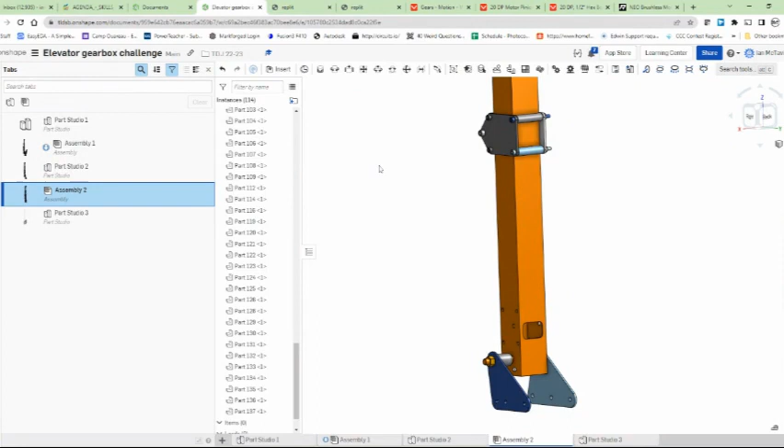Okay, so it is time to figure out how to make mechanisms move. So what we've got here is, I'll actually pull up their previous version.

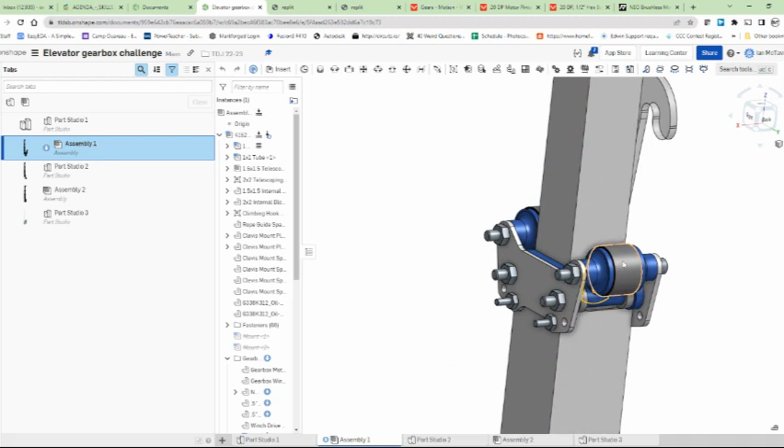This is our elevator from the 2022 robot. And what we have is a cascading elevator. So the idea is you have this square tubing and you have these constant force springs.

So the top, this constant force spring is actually attached to that hole right there. And the idea is that that pulls up. So these all pull up. At the very top, there's actually a string attached.

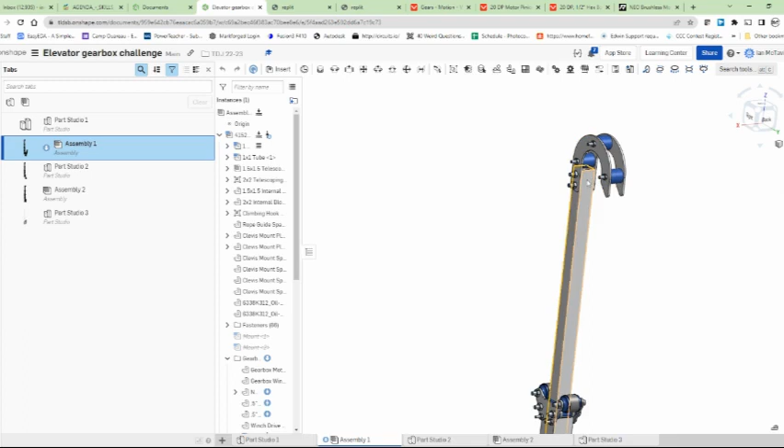The string goes all the way down to the bottom, and you have a pulley. So the idea is that when this motor runs, it winds up the string, and that causes these pieces to get pulled down. And when the motor is released, the springs will actually pull it up.

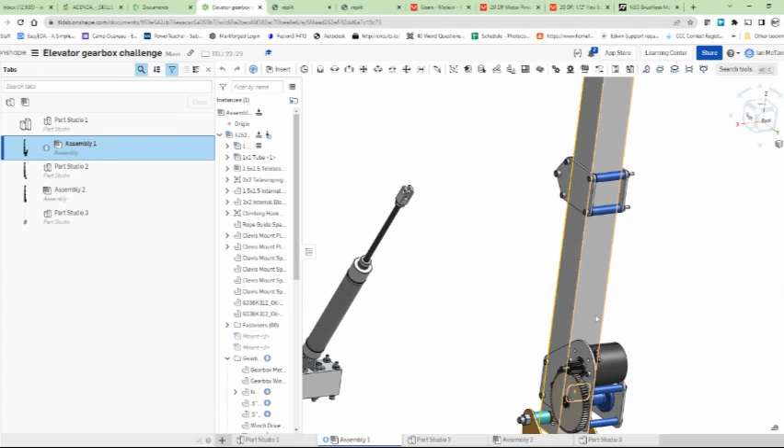So it's the elevator, you can only control the one way. The springs automatically push it up. So this is what we use to climb. And we've got a very simple gearbox here. And that's what we're going to go over to design.

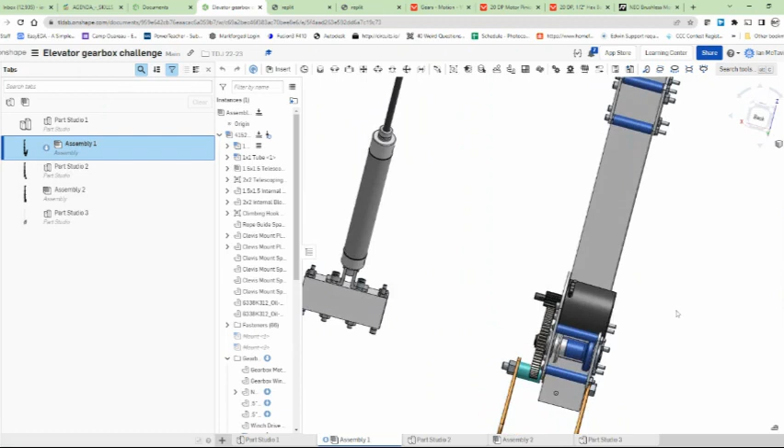So the question is, you need to know some data. The first thing is that this is designed to lift a robot. That robot is 150 pounds. So that's a fair bit of weight. And what you need to do is figure out, can you lift 150 pounds?

And that's what we have a calculator for. So with the calculator, you have this linear mechanism and you can pick the motor. So I'm just going to pick for you. We're going to use the Neo motor. And the Neo motor is a nice, small, compact motor. And you can see it right there.

And the nice thing with this particular motor is that it's got a fairly high amount of torque. And what that means is torque is how much weight it can lift. So basically, it can lift up to 2.6 Newton meters. So this is an amount of force, and if something is heavier, requiring more force than that, the motor will stall. So that's the maximum.

And with Newton meters, you need to get into physics and everything. But this is why we're going to use a calculator. So we've got a calculator here, and basically you fill in the motor and it fills in the speed of the motor, the stall torque of the motor, what the current is, and the free current. And the biggest thing is that we need to keep our current under 40 amps.

And then you can set how many motors in the gearbox. So if we had one motor, you can see this goes red because it's drawing more than 40 amps. So we know that this would not be enough to be able to lift 150 pounds. So if we had a smaller mass, then it could lift it. And unfortunately, our robot is going to weigh about 150 pounds, so it simply can't lift it.

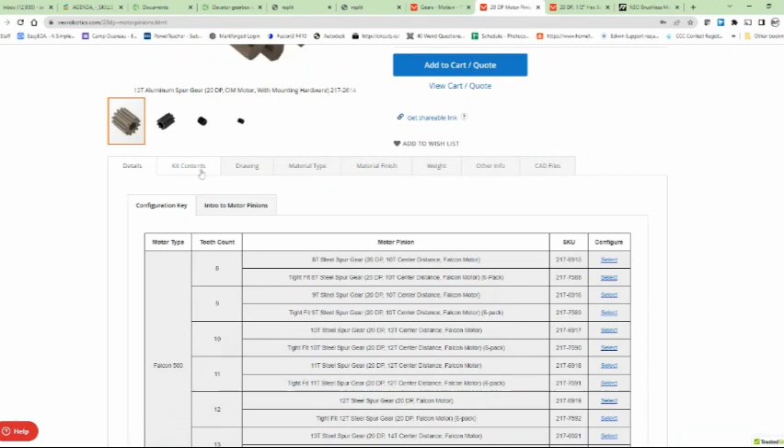So we don't need to have a Neo, we can use a CIM style motor. And you can see there's different size teeth with the different CIM styles. So when you're looking at this teeth, there's the CIM style, so 10 teeth and everything.

If you go to the drawings, we're just going to switch to, so these are falcons, 9 teeth, and here's our 10 teeth. So there's 10 teeth, and you can see there's something called the pitch diameter. So the pitch diameter is the distance of the circle where the teeth will engage with another circle.

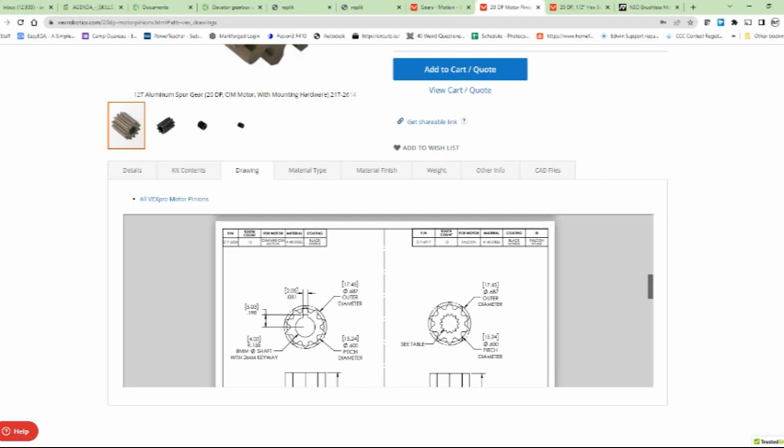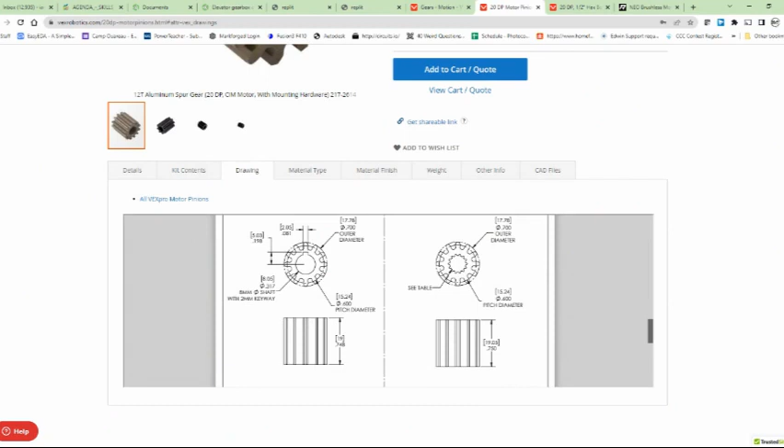That's really important. Now, normally, if we're dealing with 20 diametrical pitch, 20 dp, which is what these gears are, normally you can take the number of teeth divided, and when we get to 12 teeth, you'll see that. So here's 12 teeth, and the pitch diameter is 0.6. 12 divided by 20 is 0.6. 14 divided by 20, 0.7, etc. Now, when it gets really small, like 10 teeth, that kind of goes out the window. But anything bigger than 12 teeth or more, we can use that as a formula, which is really useful.

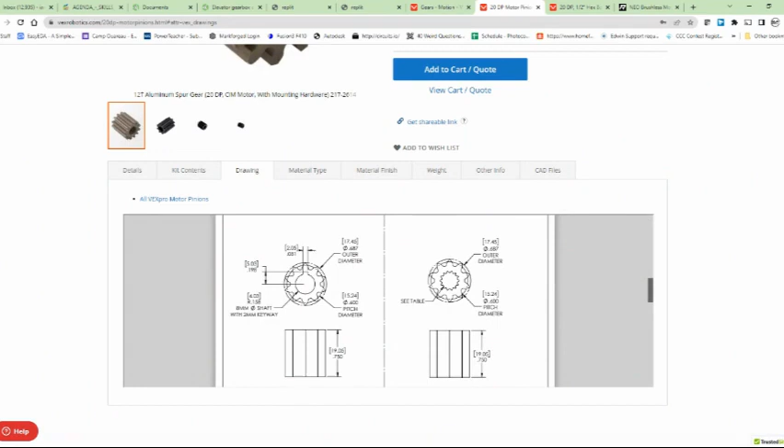So we're going to start. I'm going to start you off. You're going to use a Neo motor with a 10 tooth pinion. Okay, so that's what we're going to start with.

And when we're looking at this, we can see there's other gears. And so the 1/2-inch hex bore gears, there's our options. You can see we've got a lot of different options here. And basically, any of these options—so let's just pick a 50 tooth gear and let's plug that into our formula.

Now, we're going to use 2 motors because what we'll do is we'll do 2 arms. So we'll do 2 arms. And if we look at this, 34 amps, 10 to 50. So this should be able to do it. And it even tells you how fast it's going to take, just under a second to move the full 33 inches. So this is pretty good.

You can see we've got other options. And the biggest thing is that I would like to bring this down. I like about 25 amps, because if I'm at 50 teeth, 34 amps, that's 40 amps is my breaker. If something goes wrong, I could easily go over the 40 amps. So let's say I've got my 150-pound robot, another robot lands on my robot, adding the weight up to 300 pounds. In that case, I spike and it's just not going to work.

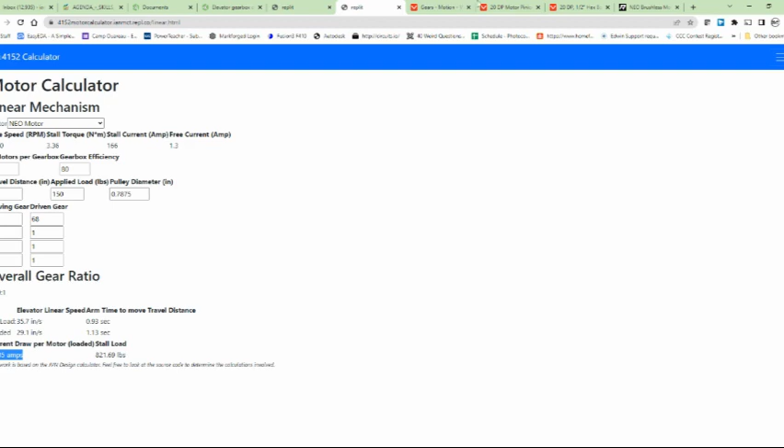So if we look at our drawing again, I mentioned 68, and the diametrical pitch, the pitch diameter, if I scroll down to 68, is 3.4. 68 divided by 20.

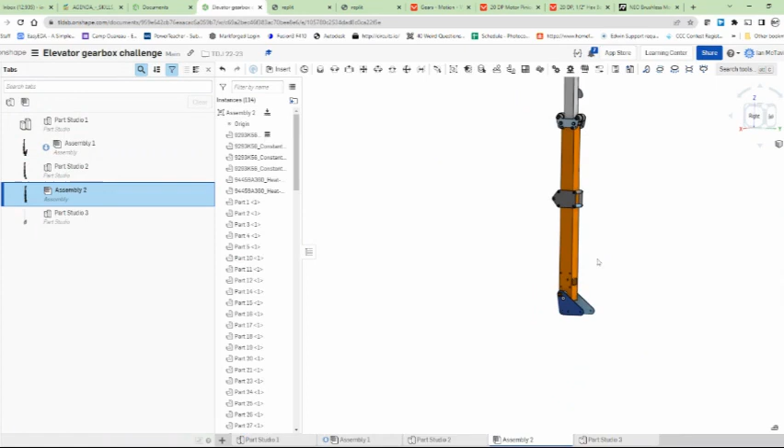Okay, so let's go over how to design our gearbox. So in this assembly, we've got everything, but we don't have the gearbox. Now we've set up our mounting holes, so that's good for us.

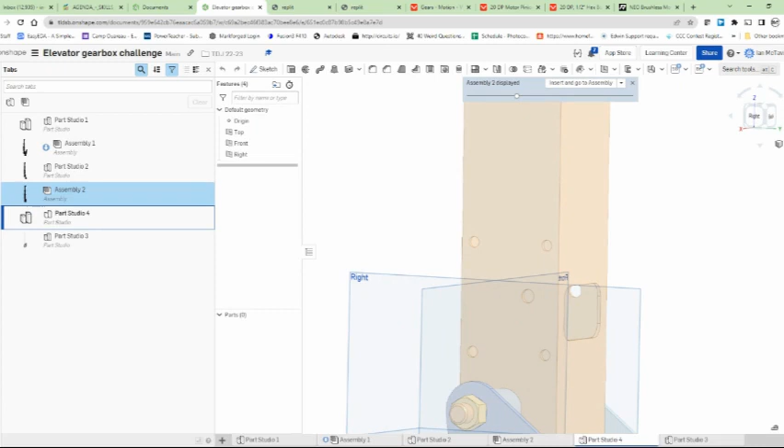We can use that. So what we can do is we can create a part in context. And we're just going to set the origin. And there's our part. Now, if we do a new—

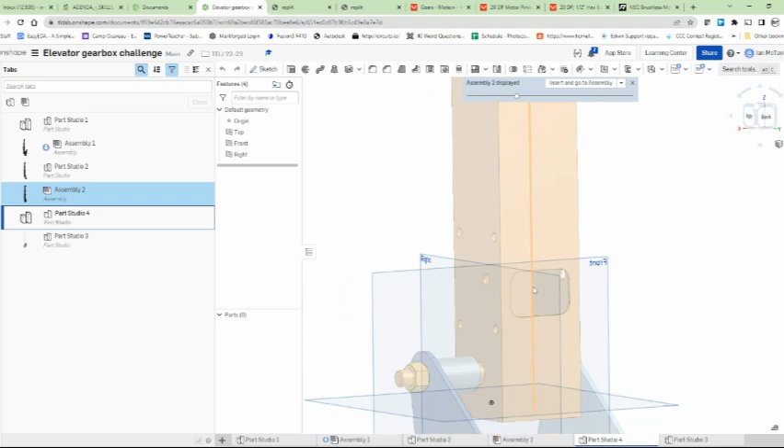What we want to do is basically we're going to have our pulley pull rope through here. And this is to have just a little bolt through here so that the rope is going to go around a little spacer so that there's not much friction. It's not going to wear and cut on the edge of the metal. So that's the goal, is where we're going to put everything.

And what we'll do is we'll create a sketch and we'll use this face as our guideline. Actually, I'm going to cancel that, because what I'll do is start with some variables. So my first variable is simply a number, and it's diametrical pitch.

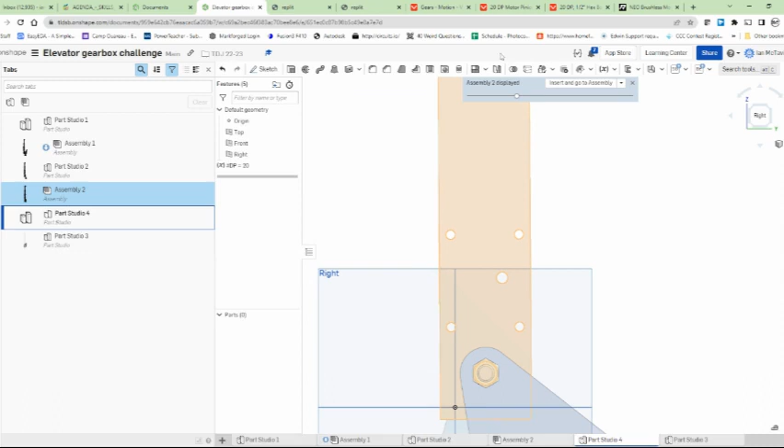And what we'll do is I like putting in my different gears. Gear 1 has 10 teeth. Gear 2 has 68 teeth. Now, gear 1, simply because I can't calculate it—

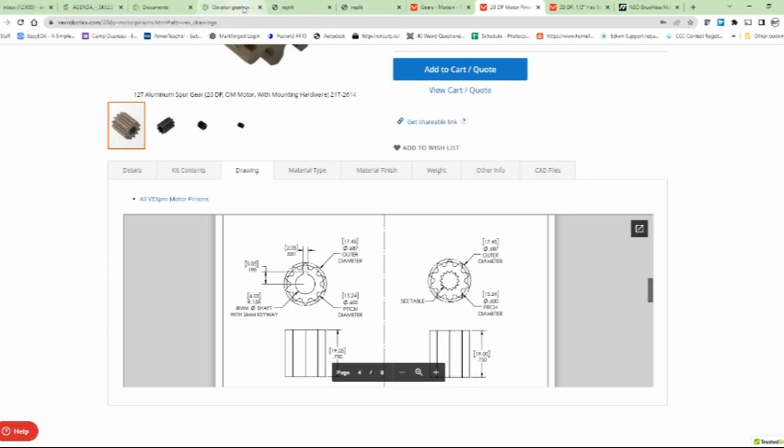So there's the 10.6. So gear 1, PD 0.6. Normally I calculate it, but for that particular gear, I can't.

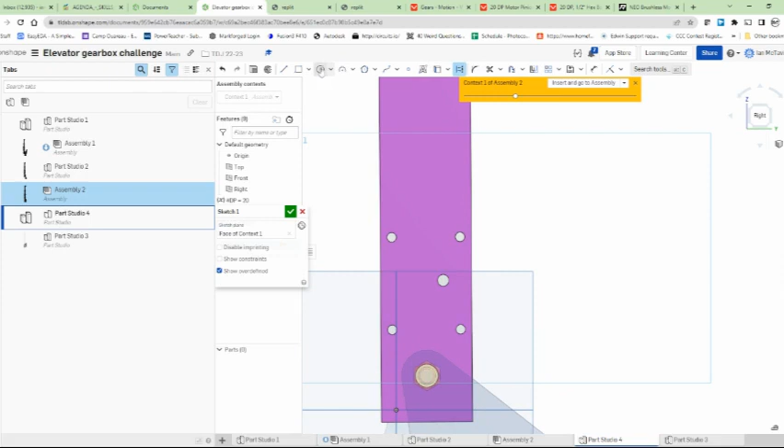So I've got my teeth. Now I can create my sketch. I'm going to select that face. Now what I'm doing is I'm going to create construction circles, letter Q, and letter C for circles. And what I'm going to do is start with a circle right here, and I just hit escape. I'm going to go to my dimension tool, and this is going to be number sign gear 1 DP.

So that's my motor. And I'm going to add another circle, and again, construction. And this time you see how I'm touching it, so it's tangent. The reason I'm hitting escape is because when I'm entering variables, it's not as easy. So now gear 2 divided by my diametrical pitch.

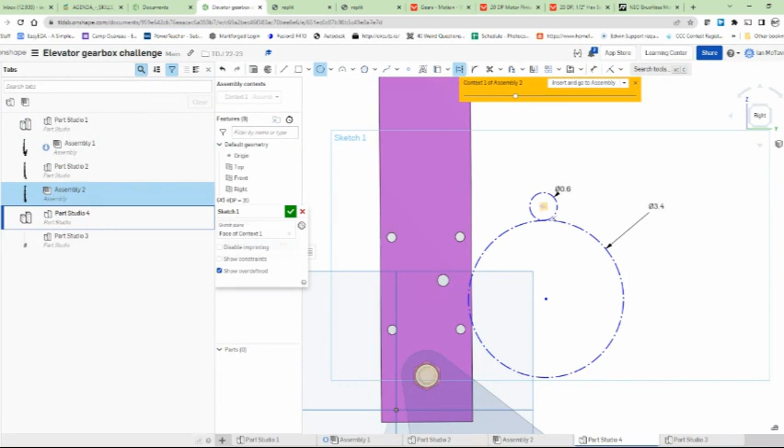There's my 3.4 inches. So I have that. I have my motor. If I look at this, I can see the body diameter is 60 millimeters. So what I'm going to do is add another construction circle centered on that one. And the reason I'm doing that is I just want to make sure that I don't want this to be touching that wall at all.

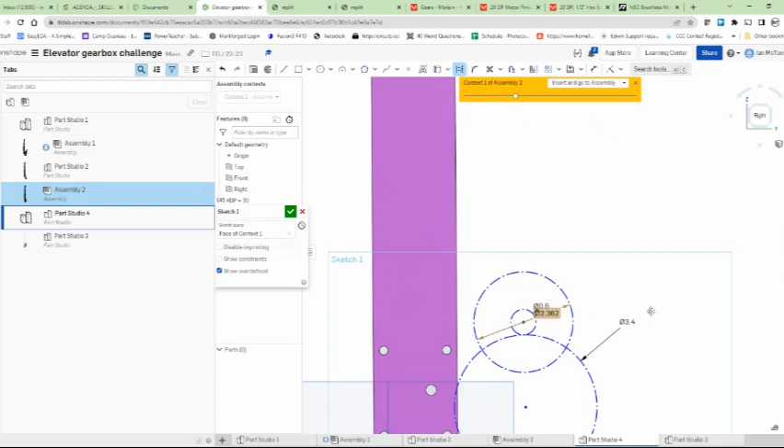So that looks pretty good. You can see I'm going to use, and I'm doing the construction, I'm going to use this line. And the reason I'm using this line is I want a point right in the middle of that slot. And this point is going to be horizontal to it.

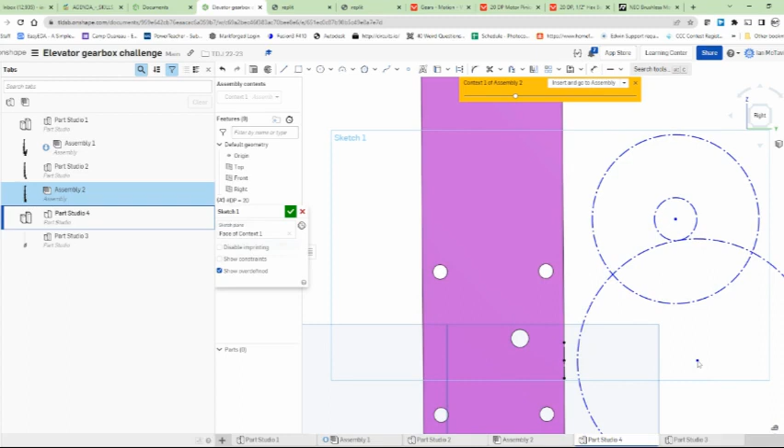So there we go. So I have my circle, and I'm going to make sure I don't want to be touching that at all. I'm just going to have a nice close thing so that circle is locked in place. And this I can move around wherever I want it, but you'll notice it's always touching that. Just for symmetry, I'm going to have it vertical to that.

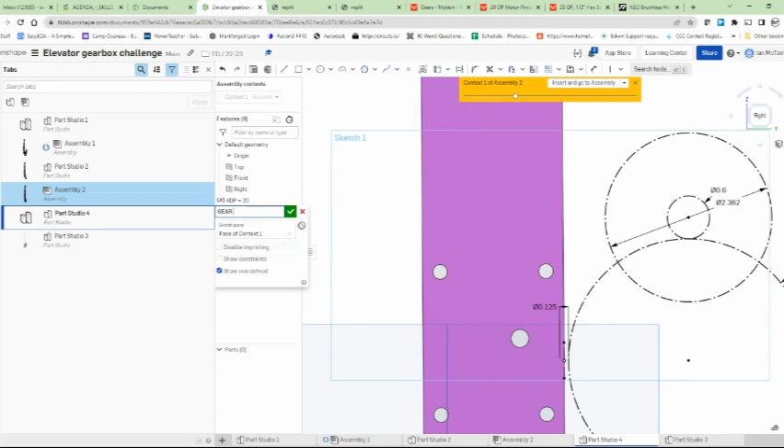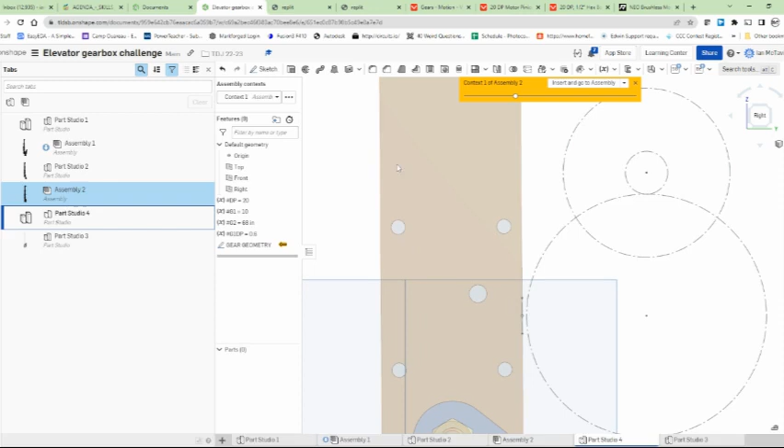So there we are. So there's my sketch, there's my gear geometry. And the beauty of this particular system is that if I decide I would rather use a slightly bigger gear, and obviously I'd do my calculations, I can modify it and everything is going to work because of how I've laid it out. So there's my position for my gears.

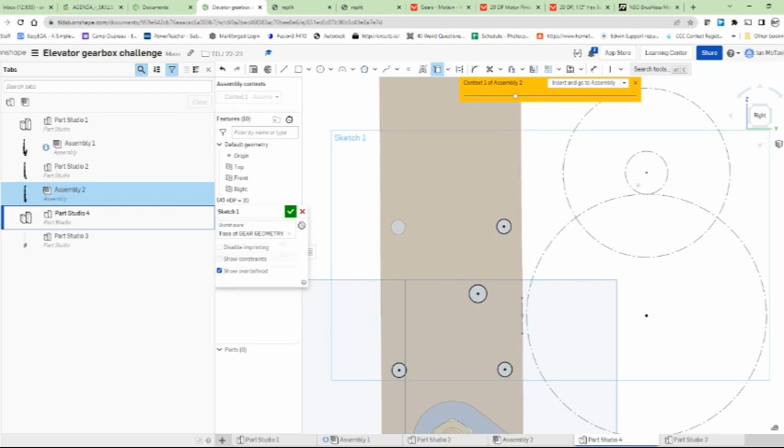So I'm going to create a new sketch, and this is going to be my plate. So I'm going to use that face. And again, this time I'm going to get these circles. And I'm going to select those points. And what I'm going to do is just use construction, just so I've got it. Okay, so, oops, I missed that one right there. And I'll just do this line right there. Okay, so these are going to be my holes.

Now I'm going to need a hole for this particular spot. So what I'm going to do is create a circle. And this circle is going to be 1.125 times an offset. And I'll just do 0.01. So what this is, 1.125, and did that work all right? I don't think that worked. Number 1.125, or sorry, this is my offset 0.01. And you can see it adds that variable.

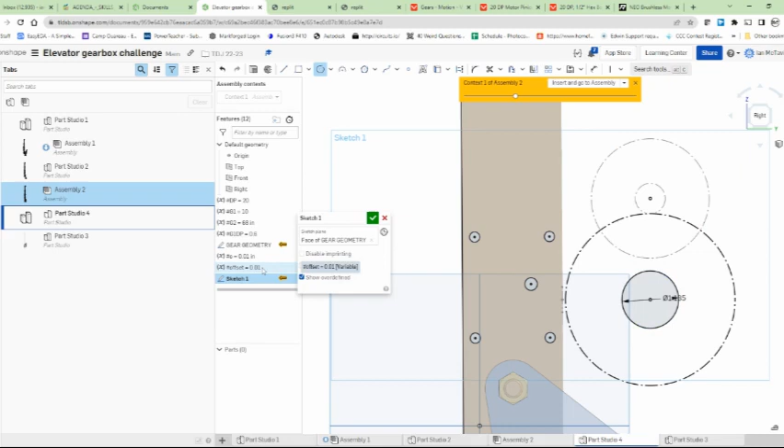So 1.125 is the diameter of a typical bearing that we use, so that's why I'm using that. And the offset, I always want to make sure to include an offset. So when I'm using the CNC machine, I cut it out and it's just slightly bigger so that the bearing fits. If it's the same size, it won't be. And by using it as a variable, I can mess around with it and change it.

So my Neo motor as well, let's look at the drawing for it. And here's the drawing, and there is no drawing. Let's try this one. There we go. So you can see there's this little bit right here, 0.75 inches. And so I'll use that. And again, 0.75, I'm just going to add that offset.

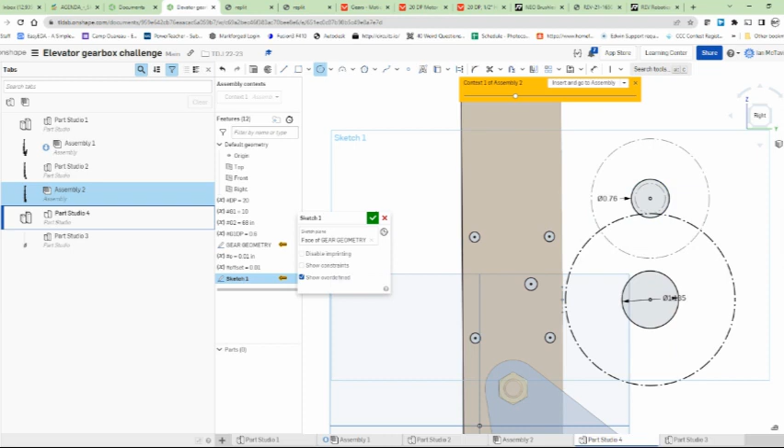And you can see there's mounting holes. There are 4 holes, and the holes are on a 2-inch diameter circle. So what I need to do is figure out how I'm going to mount this.

Obviously, the reason there's 4 holes is so that I can mess around. I'm just going to use a line here, so 2 inches was the distance.

Remember, when we're dealing with number 10 screws, 13/64 is the size. So you can see I'm putting circles on the ends, and I've got my equal sign. The letter E is equals, so those are equal in size.

What I'm going to do is take the midpoint, click on that line, click on that point, and now these mounting holes are going to fit. I can mess around with this, but I'm just going to use the letter H for horizontal, so those holes are not going to conflict with this gear. Everything looks good.

So that's awesome. What I'm going to do here is just take a line, and we'll say 2 inches, and I'm just going to dimension that.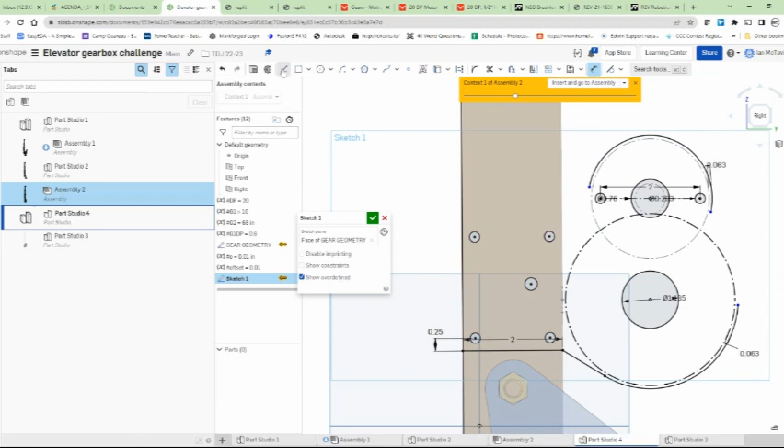But again, if I do a line and tangent the line to the curve, tangent the line to that curve, I can get a nice shape here. And again, tangent that line to that curve. And if I just set this line...

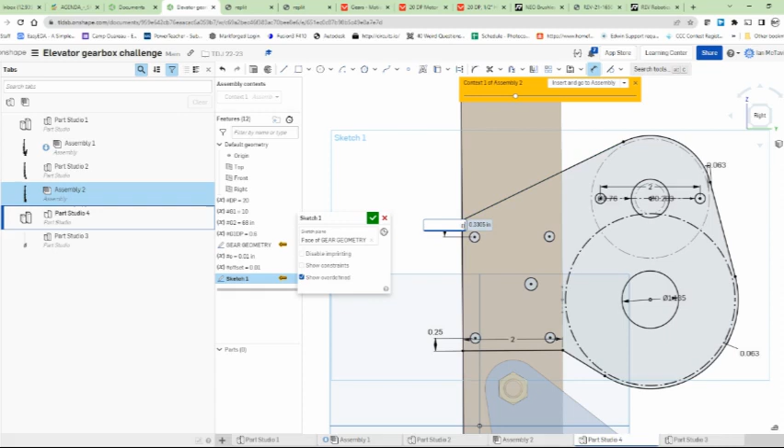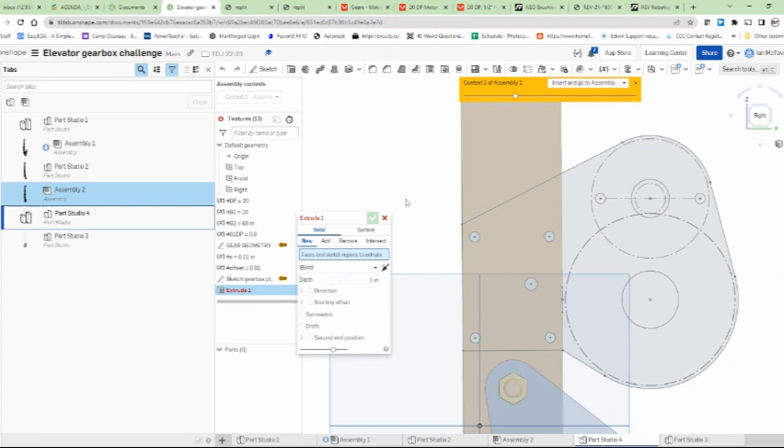Everything's good. So I now have a sketch. There's lots of different ways we can do this, and I can extrude it. Just like that, I have a gearbox plate that can work.

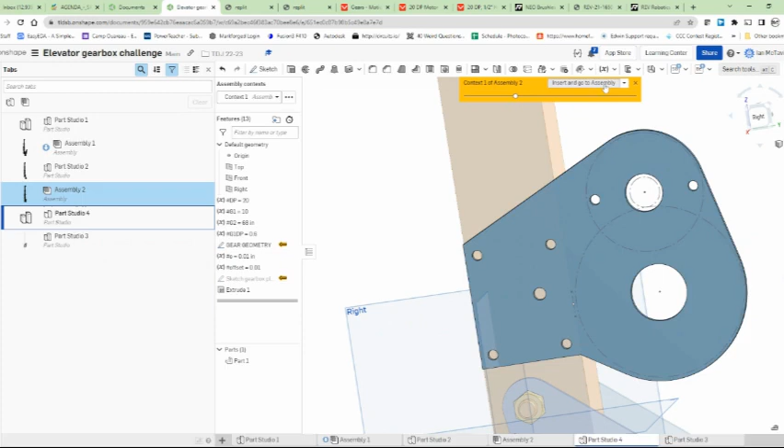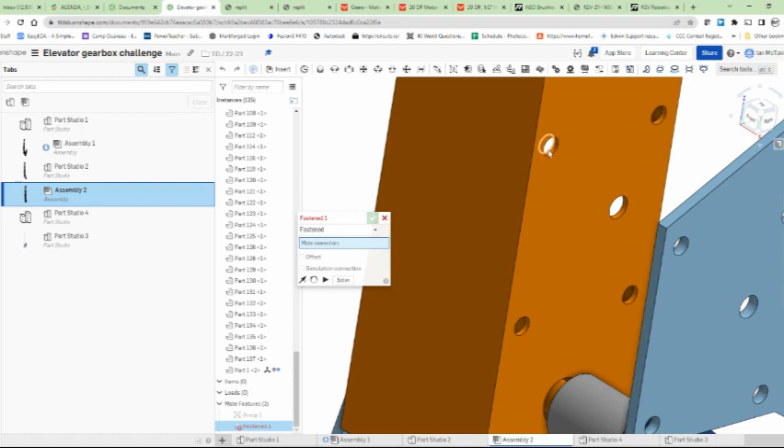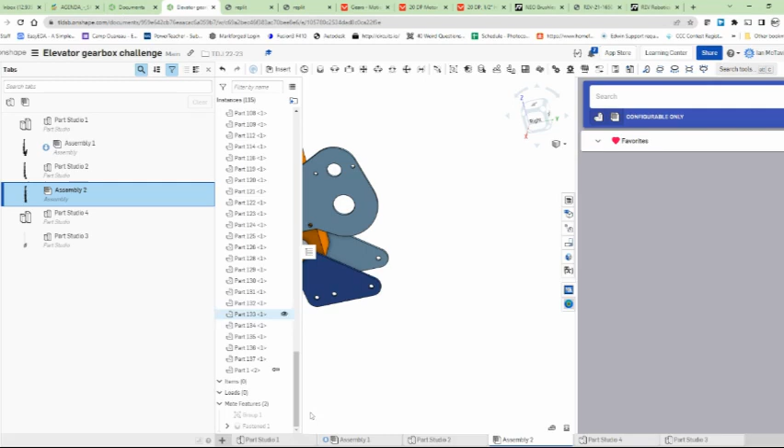And using... so I'm just going to fasten... go back in. I can now use MKCAD, and what I can do is add my bearing. I'm just going to go back to the previous.

So you can see they've got fasteners in here, and you can see this is all organized.

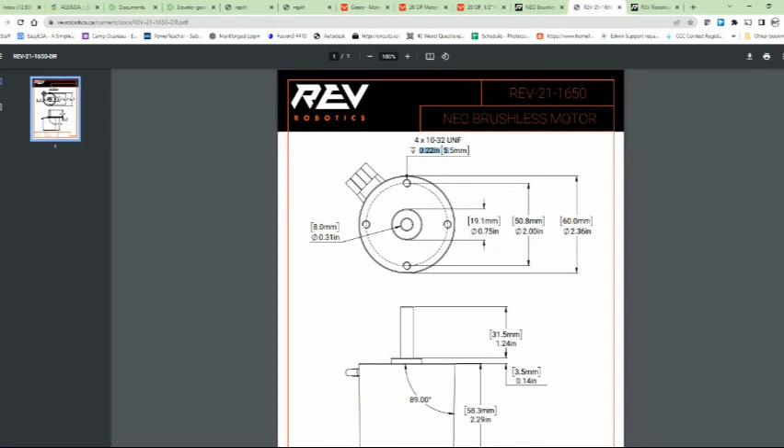So that's 3/4 of an inch, which actually I think is too long. This should only be 0.22 inches long. And this is 0.125, so this should be 3/8. Somebody made it 3/4 of an inch, which is far too long. That would be an issue.

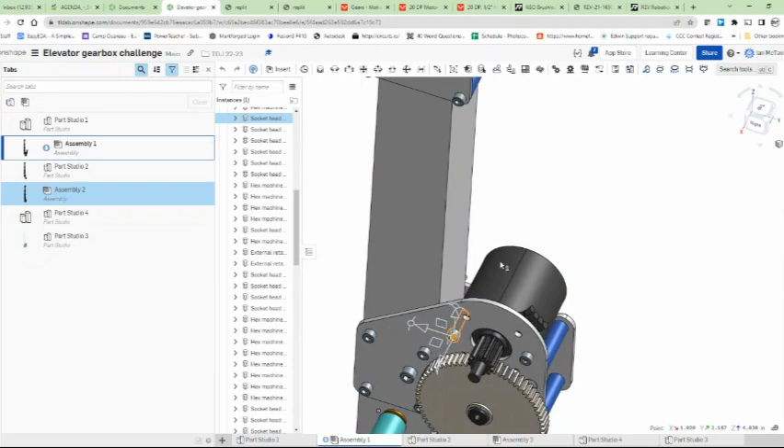So one thing. So basically, we've added a NEO motor. On the NEO motor, we've added a pinion, and we've added a gear. You'll notice that we've got two separate plates here.

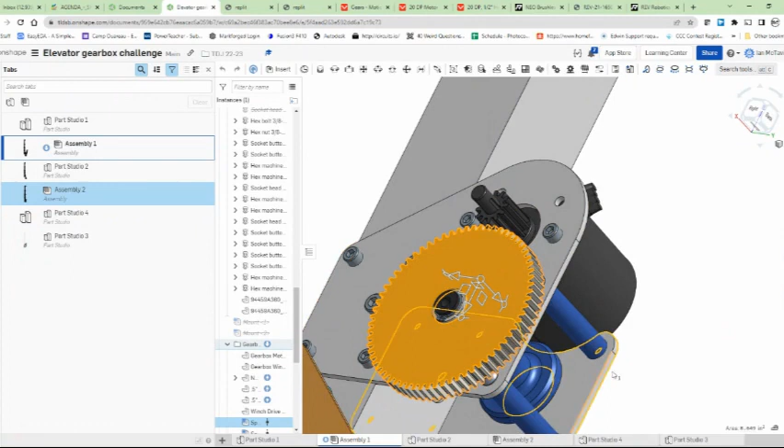Now, their technique in this particular one, and this works perfectly, is just straight. It had been a while since I looked, I thought this was flush, but it's not. So the straight would work perfectly, and it's easier to make if it's straight, so that's probably a better solution.

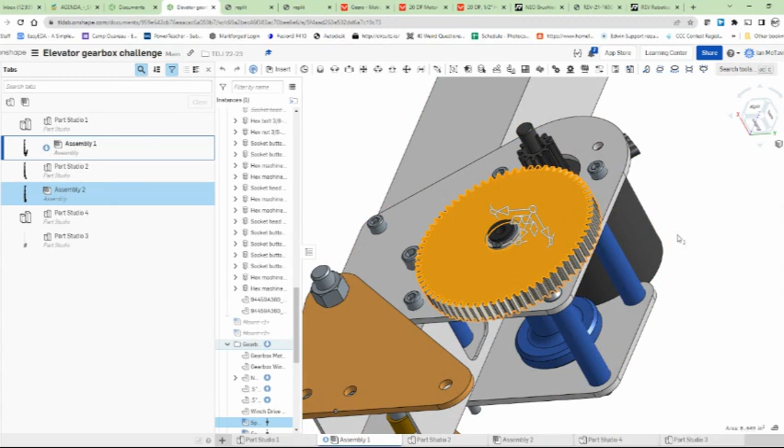And you can see you've got the gear. If you hide the gear, you can see there's the bearing, so it's a 1/2 inch hex bearing. So there's 1.125, that's the outer diameter. So that's what we're talking about.

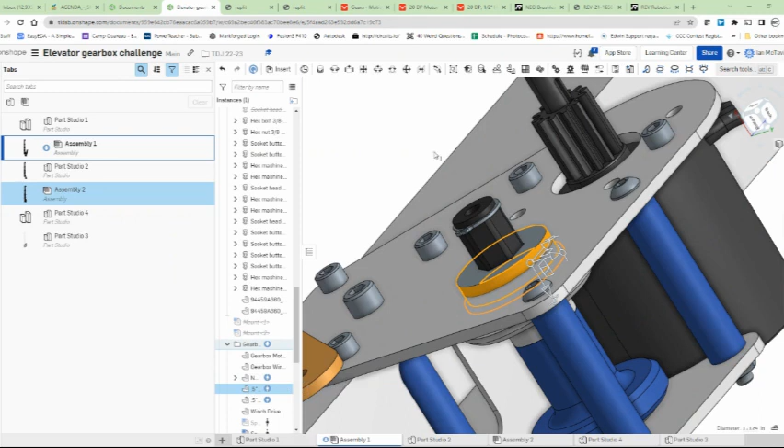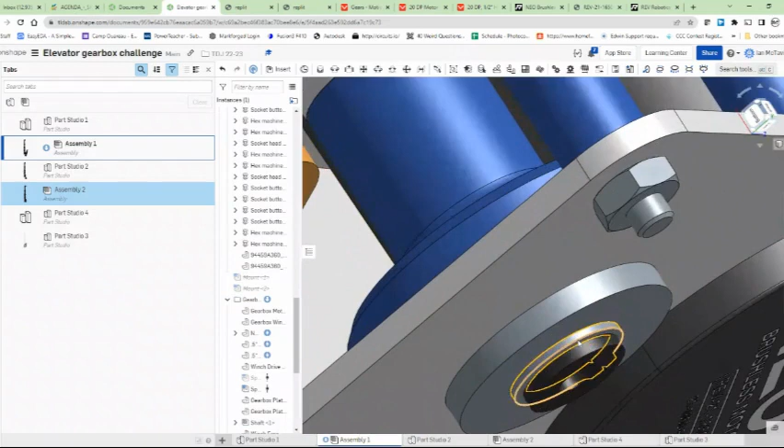And you can see with the bearing, we've created some custom parts so that everything fits perfectly. And you've got the shaft. You'll notice with the shaft, we've got this external ring, and that ring is what holds it in place so that it doesn't just slide out.

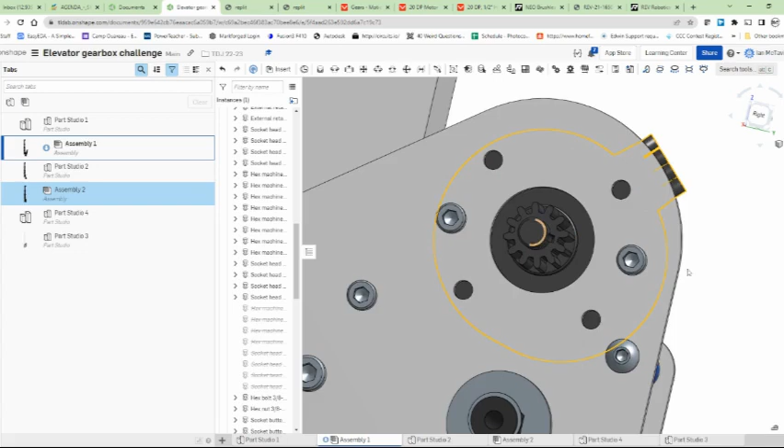And we're missing that. There's a type of ring that should be on here, and there should be a keyway, which is just a little piece of steel, 2 millimeters by 2 millimeters, so that locks the pinion with the shaft so that it goes around, and then this retaining clip goes on top. But you've got the basic premise.

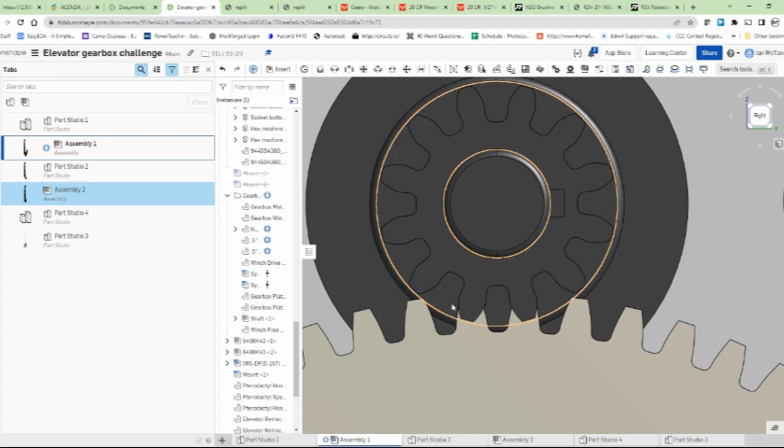The biggest thing is making sure that your holes line up, and you can see when the gears line up. Now we would need to rotate them, but these teeth, if this was rotated, the teeth would actually fall right inside, allowing it to make contact and rotate. So that's how you do it.